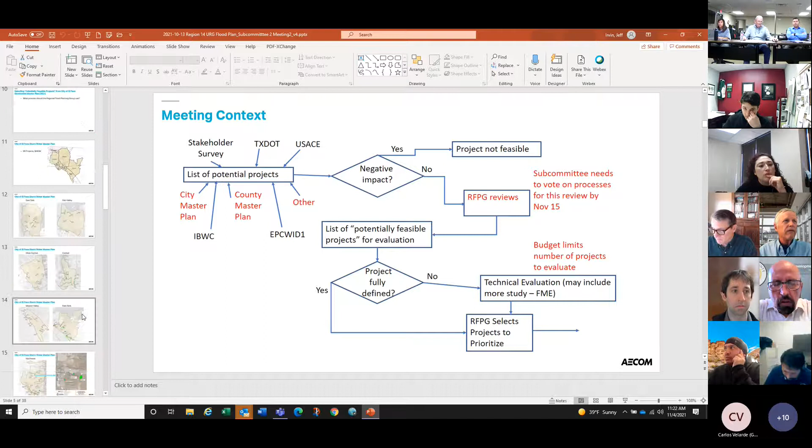Hey Jeff, this is Gilbert. Is there going to be a different group of fundings set aside for studies, or is it all competitive? Is it going to be like a statewide portion of the funding that goes for studies? In other words, if we propose one of these projects as a study, would it be competing statewide against other projects that are also asking for a study?

I think that's a question for the TWDB, and they're not on the call. But I think they've just provided us with added budget for FMEs. Chris, you know that issue.

Yeah, I think it was - Brian or Gilbert can correct me if I'm wrong - but I think it was about an additional $100K for our region for this scope of work that would be due in the August timeframe.

I'm not sure if that's Gilbert trying to talk, but it's not coming through very clearly. And then there's also an additional, I think, 500K or 550K for implementing some of these FMEs that we come up with, and those would be due at a later date. So Brian, am I getting that right? You agree with that?

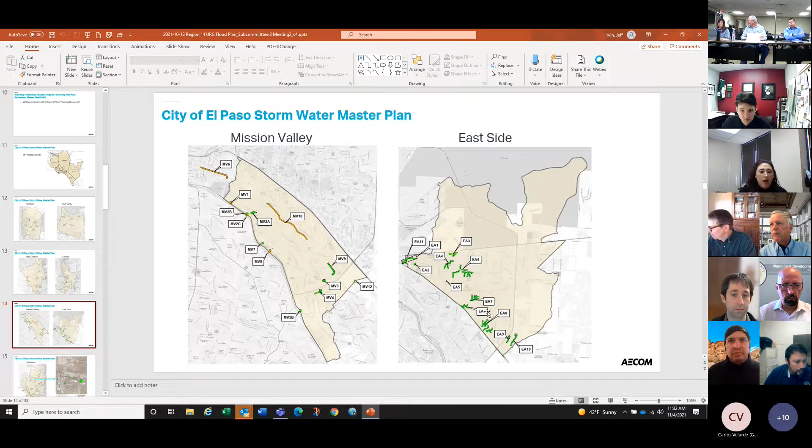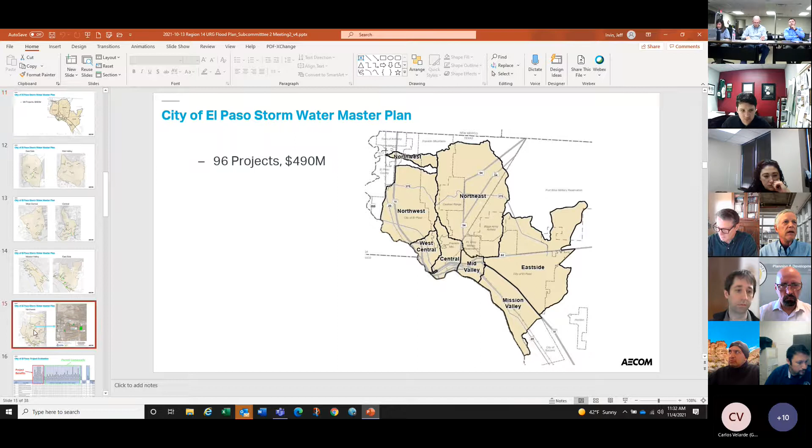Lastly, looking back up at the northeast—on the northwest side, sorry—the projects are largely up against the Franklins.

Again, there's a series of detention basins to catch water, debris and sediment coming off the Franklins. Down in the Rio Grande Terrace, there's a series of projects to improve the drainage into the Rio Grande, addressing lots of flooding along Donovan Drive and flooding along the Mesa Drain. These projects improve the conveyance into the Rio Grande.

So every one of these projects in the master plan has a figure that details the different components of the project. In a lot of cases it's not a single project—it's a project with multiple components associated with it.

All these projects were identified through a process where a problem was identified, then a need was identified for that project, and then a solution to address that need was developed. In this case, in the Stormwater Master Plan, they were all structural solutions because they cost money to construct.

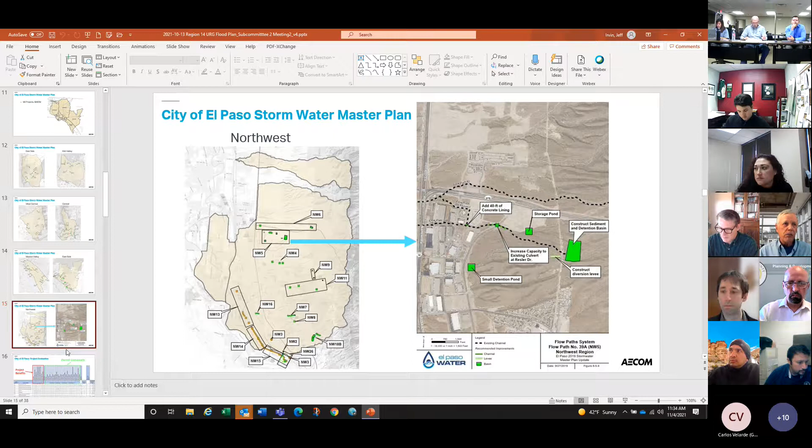All right, so the way the city—and this is what I need you all to pay attention to as the regional flood planning group—because you have to buy into this process or not.

At the end of this, we're going to have you vote on whether you want to create your own process for evaluating the projects, or whether you're going to accept the process that the city went through in order to evaluate these projects.

We're going to do this again for the county. So I'm explaining now how they evaluated those projects, and at the end I'm going to ask: do you accept this method, or can you conceive of improvements you want to propose? Today we're dealing with the process, not actually voting. We're not even saying what the actual benefits are or what the point totals are. We're just defining the process today.

So the way the city of El Paso defined their process: in coordination with a stakeholder group, they defined what they thought the important project benefits were, and then they made up a list of permits, which typically added complexity to getting the project executed. So these are the benefits, and the complexity was about whether we could realistically get this done because of the hurdles we have to go through to get it built.

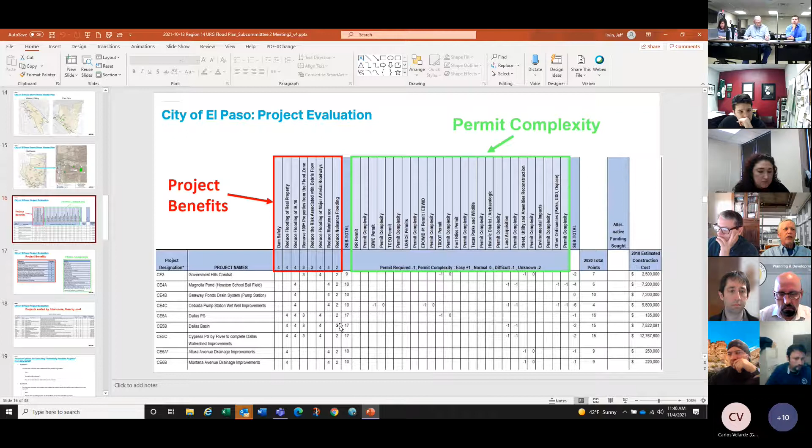So after all the points were totaled up, the projects were sorted by their total points in inverse order and ranked from top to bottom. If a bunch of them had the same point score, they were ranked according to cost — so among projects with 15 points, the least costly one popped up to the top.

So now let's open this up to questioning. We're going to have a series of polls here.

And now's where we're opening up for question, and there's no need to rush this decision. We can talk for as long as you all want. But the first question is, can we make a decision on which of these projects to carry forward for ranking with the qualitative factors used by the city in the Stormwater Master Plan? Again, this is not choosing them for the plan. This is just choosing whether we're going to evaluate them.

Jeff, I think Omar has a question. I'm sorry, somebody else has to pay attention to the hands, or warn me. That was Omar. Do I need to do something here? Omar, go ahead, you have something to say?

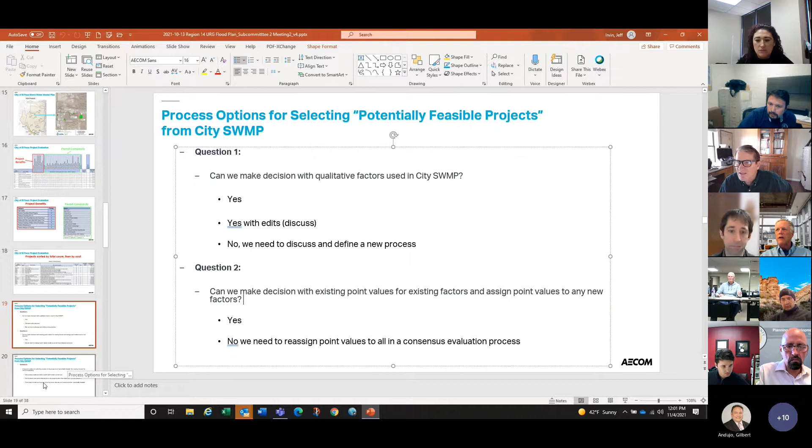So the third question is, again, I have to define this in the process for the TWDB on November 15th. We have to put to the full committee some process that we recommend for this. So what process do we recommend for selecting the number of city projects as potentially feasible?

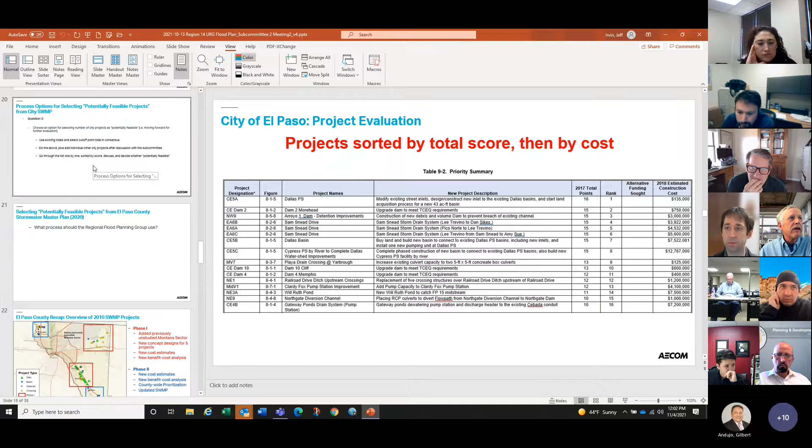So basically, we end up with a total number of points. The question is, how do we select the projects that we're going to carry into the plan? The options are either use the scoring totals and select the cutoff point total by consensus, or we go ahead and add other city projects after discussion with the subcommittee. Do we want to give a final chance for the city and anybody else to add something to this list? And then the other option, which I think you've already dismissed, though not formally yet, would be to go through the list one by one, sorted by score, and discuss. In other words, rather than use a sorting mechanism, have a discussion where we talk about each individual project.

Can we vote on this? Given what Gisela told us about lessons learned on issues like property ownership, willing landowners, and all that kind of stuff, are those issues already considered in the scoring? Yes. Okay, so going through each one and discussing it individually probably won't give us any new information. I don't think so, no.

So that eliminates the third choice. The way we have it now, we would make this pass through and change the permit complexity once. Then we'd sort it, and look at how the points are arrayed, and decide in consensus, all leading the discussion, how many of those projects we're going to carry forward into this plan.

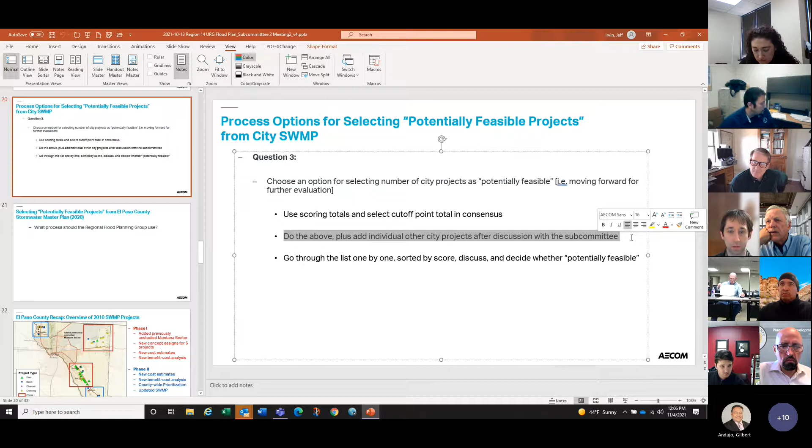All right, so now we have 25 minutes left. I think we've been through this once, but we're going to go through it again with the county. Just want to see the tolerance. We're likely to go over 10 or 15 minutes. Can we tolerate that? Yes.

All right, so Chris, Clint, you want to go ahead and go through the county master plan? Sure, I'll try to be quick here. Do you want me to share my own screen? Or I can do it for you if you want. Yeah, you can go ahead and do it for me.

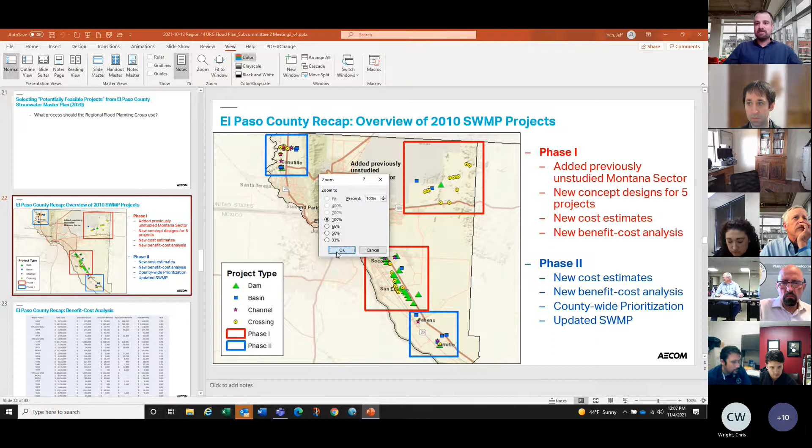Keeps it simple. So the original county stormwater master plan was developed in 2010, and I led the effort on the consultant side to update it in 2020. The 2020 update was very similar to the original plan. We just added some extra analysis and some extra areas. But as you can see on this map, the plan included 69 different projects, and the type of project is indicated by different icons here.

It included dams, which are the green triangles, basins, which are the blue rectangles, some channel improvements, largely to improve conveyance or maintenance at various arroyos or channels, and a number of crossings. If you look carefully, a lot of those crossings are in a line. They're associated with the Mesa Drain. Those were developed in consultation with the irrigation district to improve just water supply and maintenance of the drain. So even though a lot of those are considered individual projects, they generally serve the same purpose.

Some other of these projects, which are in the vicinity of Socorro, just uphill of it, were actually concepts developed by the Corps of Engineers in a study that was completed around 2013. So the county stormwater master plan included these ideas that came from different sources.

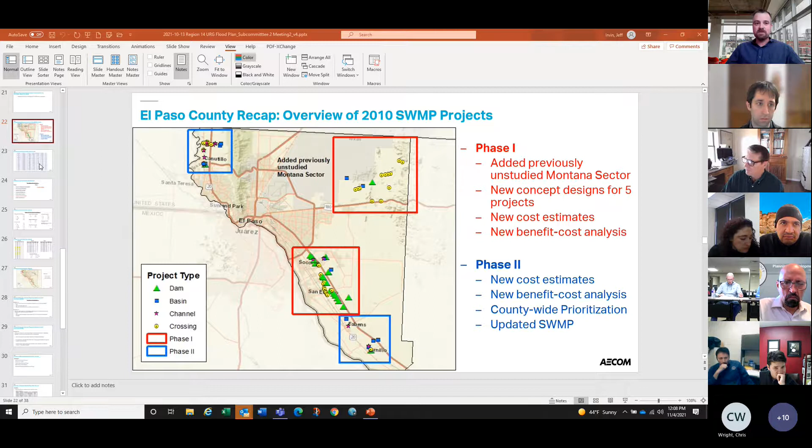Our update in 2020 was done in 2 phases. You don't need to worry about that because both those phases are complete, just so you know this is what they look like. So let's go ahead and go to the next slide.

One of the updates that was done in 2020 was this benefit cost analysis to develop benefit cost ratios for each of these projects, which we know is an important step that needs to be done at some point. In this table, each row represents a different project. For each one, we have the cost estimate in total cost, but next to that there's also the annualized cost. So keeping in mind here, when you develop a benefit cost ratio, everything has to be done in annual terms, using the current discount rate.

And then we looked at two different types of benefits: structure benefits and agriculture benefits. The total number of potential benefits for any given project, there are more than just those two, but those two were the easiest to assess for all the projects in the county stormwater master plan. We looked at just those two to give us a representative idea of which projects would have a high benefit cost ratio and which ones would have a low ratio. As you can see, that ratio on the far right, the BCR, benefit cost ratio, these are sorted in descending order.

So when the master plan was finished in 2020, the county took 5 of those 6 highest BCR projects and looked at more benefits for those: roadway benefits, critical infrastructure benefits, mental health and anxiety benefits, all these things that can be legitimately counted. That actually resulted in an increase of the BCR. Each of those actually rose over 1, some of them barely over 1, from 0.6 to about 1, just to give you an idea of how much some of those other uncounted benefits can increase the number.

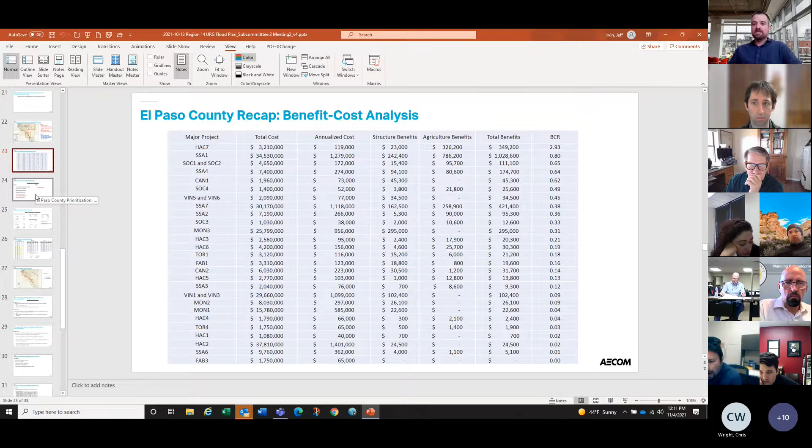It was very tempting to use benefit cost ratio as a full replacement for the county's prioritization, because it's a very important indicator of a project's likelihood to get grant funding. But since benefit cost ratio is so heavily influenced by property and infrastructure values, it would give an unfair advantage to more affluent neighborhoods. So instead of using benefit cost ratio wholesale, the county developed a two-tier, two-stage process.

Each project was given a number based on these stage 1 criteria, grouped into certain tiers, and within each tier, projects were sorted by benefit cost ratio.

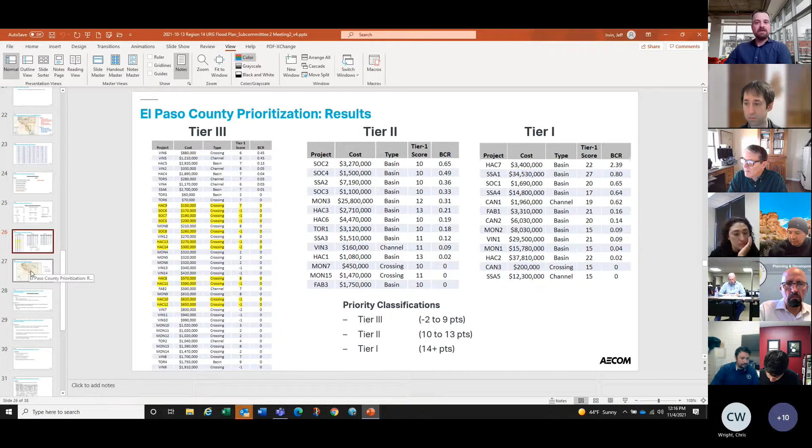Yes, and that's important to consider when we decide how we're going to prioritize these projects, which we'll get to at the end and do the same method that we just did before.

So the results of that prioritization: all of the tier 1 projects are shown in red, the tier 2 are green, and tier 3 is just the tiny little dots.

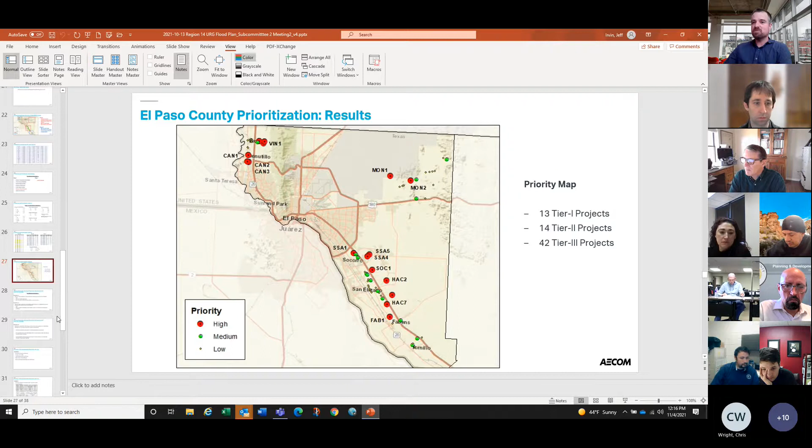Another factor taken into consideration when we developed those cutoffs was whether these projects represent the county evenly, or favor any given geographical location. This shows that the method we used spread them out in different areas, which was good - that's what we wanted, showing little bias, or as little as possible.

So the questions here, and we're going to open up to a poll in a minute, but let me just explain these questions. Question 1: can we make a decision with the qualitative factors used in the county stormwater master plan? Those qualitative factors, again, are that 2-stage prioritization, and we're not asking whether we accept the values or the cutoffs that were used.

It's just, do we want to use that same process? Do we want to make edits to it, or no? Do we want to define something new? So before we go in there, Gisela, you have a question?

Yes, if we can hear from the county to see what their experience was, and if there's any lessons learned or any criteria that they think would have been good to modify. I think that would be very helpful before we enter into any of the questions of the poll.

Isela, I guess that one's directed to me, so I'll go ahead and say that. I think we feel still fairly comfortable with what we had established at that time. But just like I'm assuming that we're going to vote later on in a similar fashion, there have been some additional areas that we did experience some flooding recently in these recent floods, and I think we would like to have that opportunity to consider some of these new sections.

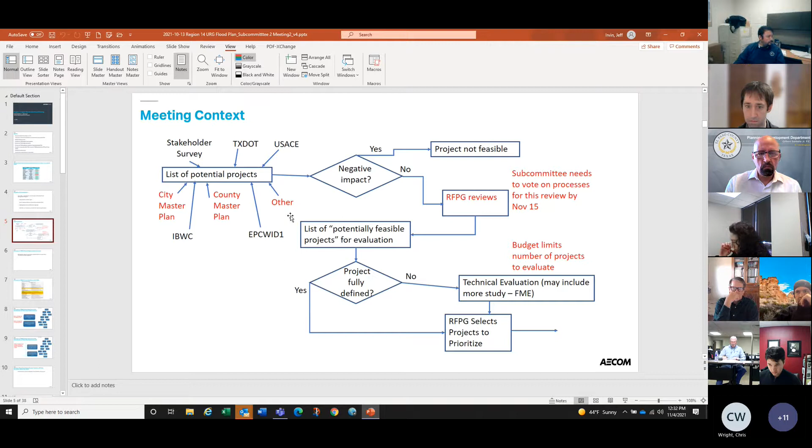Okay, so it's back to me. Going back to our original flow chart, we were going to try today to come up with the process for how to winnow down the city master plan, how to winnow down the county master plan, and how to winnow down all the other ones. We have to provide this process to the Water Development Board by early December, and it has to be voted on by the regional flood planning group before then.

So this is just a proposal to put together what we've learned by reviewing the city and county master plans and see if we can come up with agreement on a generalized process for dealing with all the other ones - the ones from IBWC, lumped in with the ones from Hudspeth County, lumped in with the ones from the irrigation district. How do we address those?

So this set of rules is just a proposed set of rules we can discuss. If a project is part of a prioritized list of projects, in other words, if there's been a public process like we had in the city and with the county, we would follow the same process as resolved above for the city and county of El Paso. We'd address all the projects in the list together.

We would basically keep that ranking system because that's what you decided for those two systems, and then choose an option to select which projects will undergo further evaluation. That would be where, as you decided for the city and county, you would rank them, add projects if you needed to, and choose a cutoff.

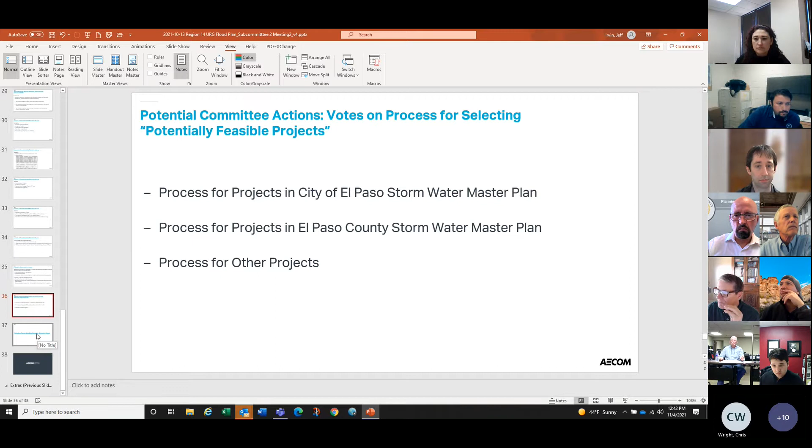Okay, so who does the tentative future meeting dates for subcommittees? Is that you, Chris? I think typically we hand it back to Gisela on that one. I'm sorry, to Annette on that one. We don't have any more slides.

Let me ask a question before we go to that. How many, if any, of the 96 city projects or the 69 county projects are already funded?

I think you have to defer to the city and county on that one. From the county: are any of those projects funded, or are they all currently unfunded? There's two that are on the list that are already funded for the county. Okay.

I'm just wondering, do those need to be removed from consideration by this process? Not on my end. Maybe the ones for next fiscal year, yes, but the ones after that, we would need to keep them.